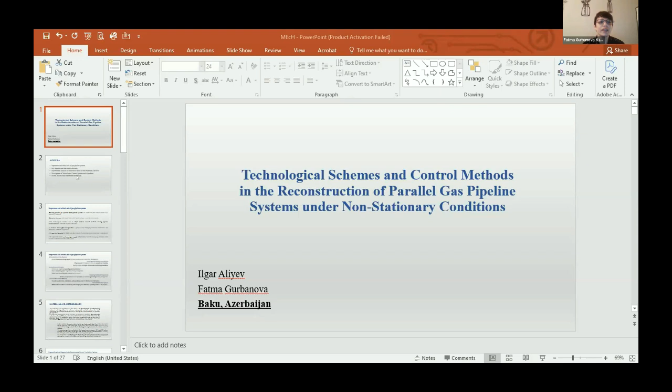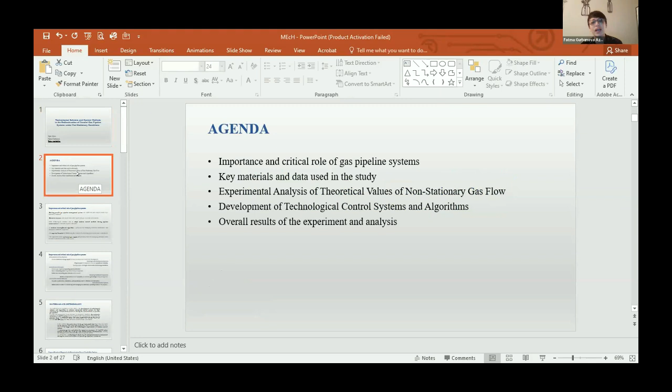Here is our agenda: we will talk about the importance and critical role of gas pipeline systems, key materials, experimental analysis of theoretical values of non-stationary gas flow, development of technological control systems and algorithms, and our overall results of the experiment and analysis.

I will begin with the importance of management systems for the operational process of existing parallel gas pipelines. Under non-stationary conditions, these systems are inefficient and technically complex. Additionally, outdated elements, which are physically worn and don't meet the requirements of modern control technologies, fail to react quickly enough and only report problems after a significant amount of gas is lost to the environment.

For this reason, it is crucial to develop new technological schemes that adopt modern control methods in the reconstruction phase of existing pipeline systems in order to eliminate negative outcomes.

In this work, based on the analysis of the mathematical model of non-stationary gas flow in parallel gas pipelines, an algorithm based on machine learning technology was developed for the information database of the control and management point of the technological process.

The developed algorithm can be recommended for solving engineering technology problems related to the prediction of technical maintenance and management of emergency situations in pipelines.

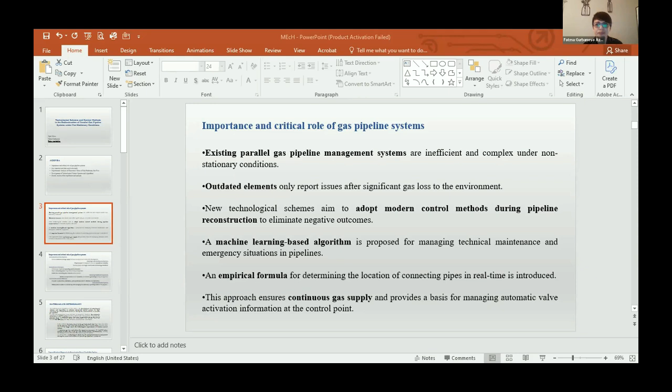Importance and critical role of gas pipelines: the increasing complexity and aging of parallel gas pipeline systems present major challenges to modern energy infrastructure. Wear and obsolescence reduce reliability and safety, making reconstruction and modernization essential.

Beyond replacing outdated components, advanced control mechanisms must be integrated to manage non-stationary gas flow and prevent hazards like leaks. This research is driven by the need to ensure an uninterrupted gas supply while minimizing environmental risks from uncontrolled leaks. Traditional valve activation systems based solely on pressure drop rates are limited, especially in emergencies.

To enhance reliability, we propose a dual criteria approach that integrates real-time valve position sensors with pressure monitoring and IoT technologies. This enables automatic simultaneous valve closure on both sides of a leak, effectively isolating compromised sections.

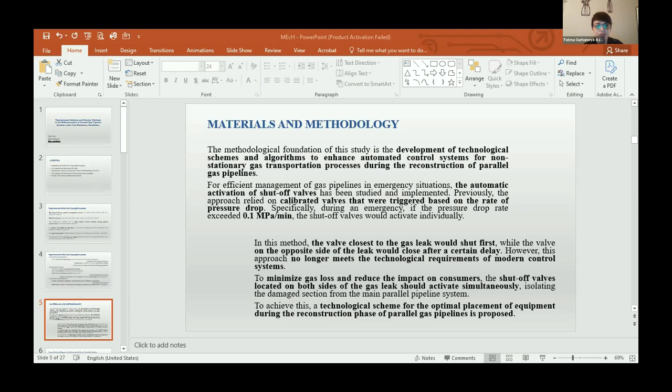They are to be installed after the connection pipe at the beginning of the gas pipeline and before the connecting pipe at the end of the gas pipeline. In the other sections of the parallel gas pipeline, automatic shut-off valves are to be installed on both the right and left sides of each connecting pipe in the network.

For the efficient management of gas pipelines in emergency situations, the automatic activation of valves has proven to be effective in practice.

Previously, valves calibrated based on the rate of pressure drop in the gas pipeline would automatically activate each valve separately if the pressure drop rate exceeded 0.1 megapascal per minute during emergency conditions.

Recently, however, with the application of valve position monitoring sensors, the automatic activation of valves has been successfully tested in practice and has been confirmed as a reliable technology.

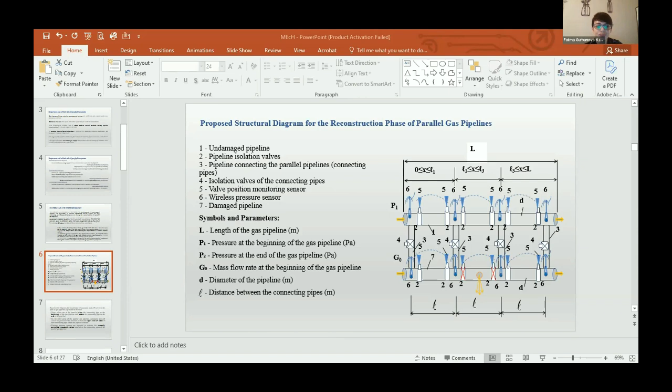I will show: close the valves on the right side of the leak. Thus, the automatic shut-off valves on both the right and left sides of the leak point will be closed simultaneously.

For the remote activation of pneumatic valves installed on the connection pipe of the parallel gas pipeline, wireless pressure sensors are proposed. As shown in this figure, it is suggested that the pressure sensors be installed on the section of the pipeline where the connecting pipes of the gas pipeline are located.

These sensors allow for the monitoring of pressure variations in the pipeline configuration, enabling the control center to track the data via the internet.

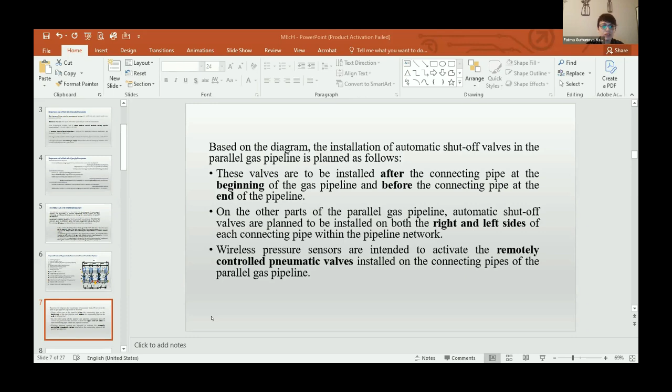In our research, we analyze various transition processes of non-stationary gas flow in parallel gas pipelines.

Specifically, in the event of a breach in the integrity of one of the pipeline sections of a parallel gas pipeline, the process of activating the valves located to the left and right of the damaged section, as well as the remote activation of pneumatic valves installed on connecting pipes for uninterrupted gas supply to consumers, are analyzed together as shown in the figure.

From the moment the valves in the pipeline close, the analysis includes the non-stationary gas flow parameters in three different sections of the damaged pipeline under the activation of the connecting pipes.

Additionally, the technological scheme for the control method of the gas dynamic process of this transition process through a control center is developed in this research.

The use of pressure sensors for monitoring the transition process alongside the valve position sensor is proposed for localizing the damaged section in emergency conditions of the parallel gas pipeline. The methodology of the proposed control system for the parallel gas pipelines follows the scheme below.

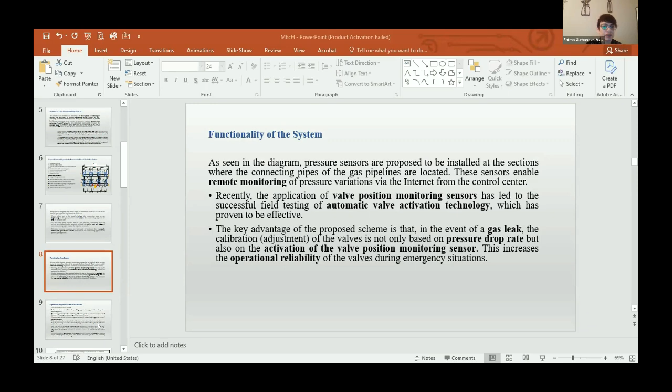In three different sections of the damaged pipeline, analysis of pressure functions of non-stationary gas flow, experimental analysis of the theoretical values of non-stationary gas flow in three different sections, and as a result, verifying conditions during a gas leak.

The status of the automatic valve closure installed on the gas line and the recording of the real-time moment T equal T1 are confirmed. Detection of the location of controlled connection pipes, archiving and analysis of data received from pressure sensors at the control station.

Remote activation of valves installed on the identified connection pipes at the central control station.

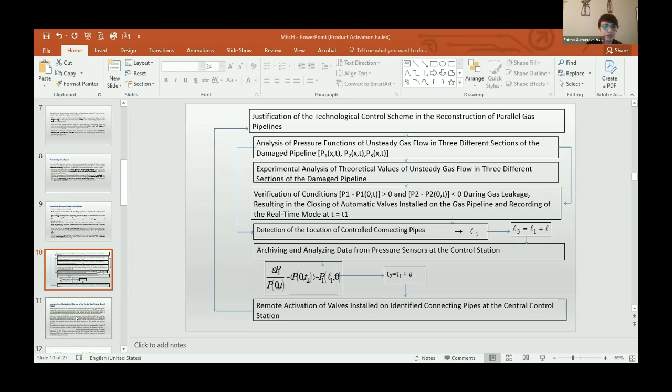Analysis of the methodological scheme of the parallel gas pipeline control system.

The analysis of this methodological scheme of the control system for the parallel gas pipeline shows that data collection through the Internet of Things, as well as data storage and analysis using cloud storage networks, is proposed to be integrated into a control center and reporting methods.

Thus, as a result of a breach of integrity in any pipeline of the parallel gas pipeline, the valves close. The valves located to the left and right of the leakage point close at T equal T1 due to the pressure drop rate reaching its limited value, and the activation of the sensors installed in them effectively isolates different sections.

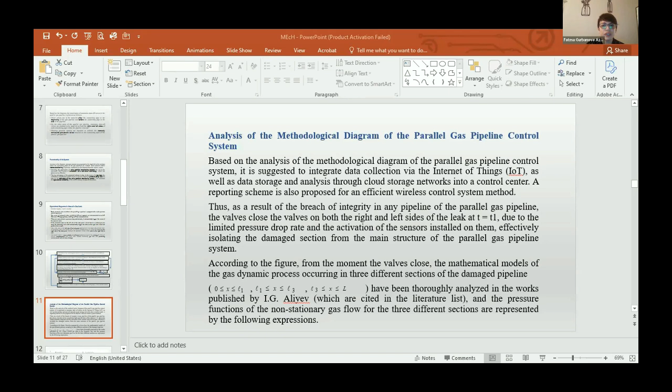As you see in these formulas, we investigated the pressure functions of the non-stationary gas flow for the three sections, represented by these expressions.

Let us assume that for the purpose of localizing the gas leak, the valves installed on the pipelines are automatically closed via the valves at T equal T1 equal 300 seconds.

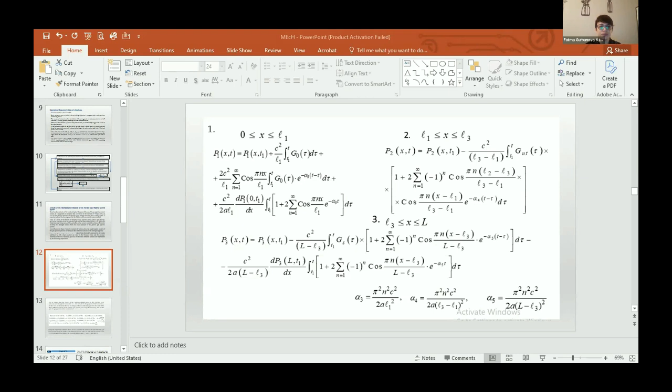For the purpose of leak localization, in this case, to determine the law of change of the non-stationary gas flow for each of the three different sections of the parallel gas pipeline, we accept the following data for the specific gas pipeline under consideration. Using this expression obtained above, we will calculate the values of the non-stationary gas flow pressure along the length of the damaged pipeline in the first, second, and third section every 120 seconds, and record them in the following tables.

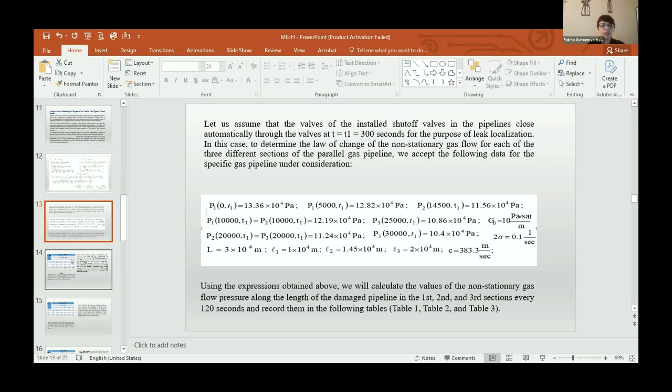In this first table, it can be observed that after the automatic valves on the damaged pipeline are closed, the pressure value along the length of the first section of the gas pipeline increases as a function of time. At the starting point, x equal 0, the pressure value increases from here, and at the interval of t equal 0 to 600 seconds at the x equal 5 kilometer point, the pressure value increases

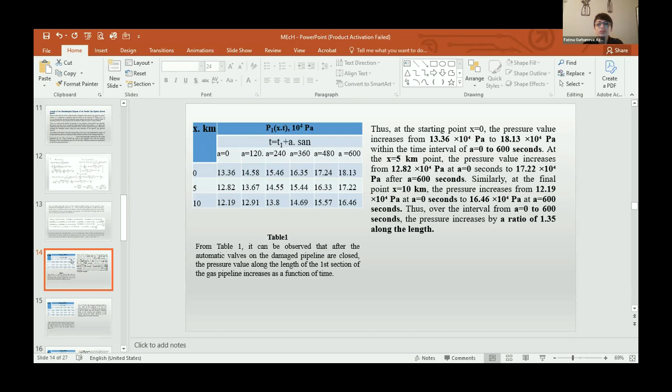from 12.82 at t equal 0 seconds to 17.22 Pascal. Similarly, at the final point of x equal 10 kilometers, the pressure increases from 12.19 Pascal at t equal 0 seconds to 16.46 Pascal at t equal 600 seconds. Thus, over the interval from t equal 0 to 600 seconds, the pressure increases by a ratio of 1.35 along the length.

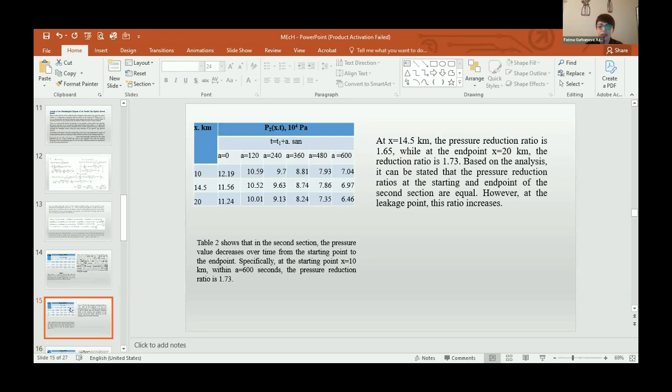As you see in table second, it shows that in the second section, the pressure values decrease over time from the starting point to the end point. Specifically, at the starting point, x equal 10 km, within t equal 600 seconds, the pressure reduction ratio is 1.73. At x equal 14.5 kilometers, the pressure reduction ratio is 1.65, while at the end point x equal 20 kilometers, the reduction ratio is 1.73. Based on the analysis, it can be stated that the pressure reduction ratios at the starting and end point of the section are equal. However, at the leakage point, this ratio increases.

From table 3, it can be observed that the pressure in the third section decreases over time from the starting point to the end point. At x equal 20 kilometers, the initial pressure at 0 seconds is 11.24 Pascal, which decreases to 9.52 Pascal at 240 seconds.

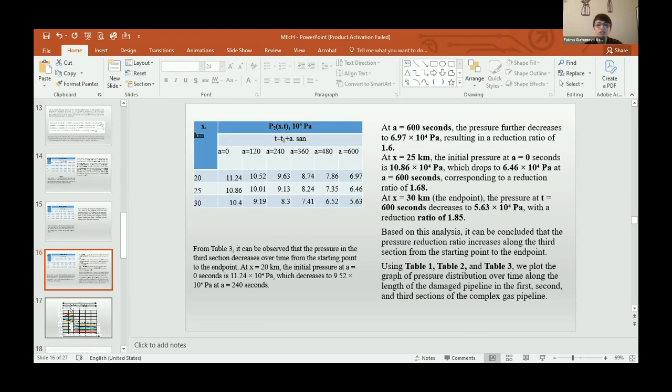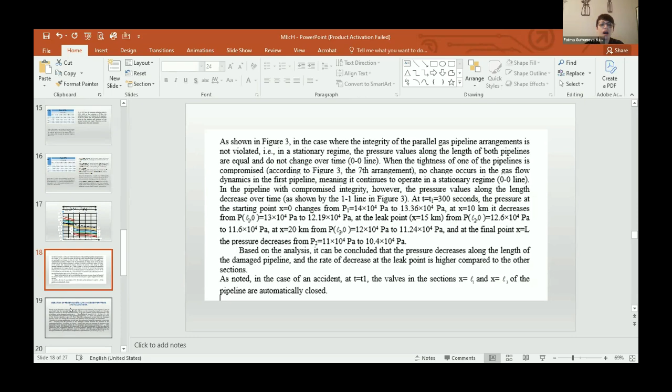As noted, in the case of an accident at t equal t1, the valves in the section x equal L1 and x equal L3 of the pipeline are automatically closed. Creation of a technological management system and algorithms based on the theoretical analysis of the gas pipeline's non-stationary flow regimes leads to the conclusion that the opening of pneumatic valves on the connection pipes at this time in the damaged section is not advisable according to the gas dynamic process requirements.

This is because in the damaged section, the pressure is lower. In the reverse direction, gas will flow from the undamaged section into the damaged section, which will disrupt the continuity and stability of the gas pipeline supply to consumers. Therefore, it is more appropriate to wait until the connecting pipes are opened at a later time, ensuring that the pressure in the damaged section exceeds the pressure in the undamaged section.

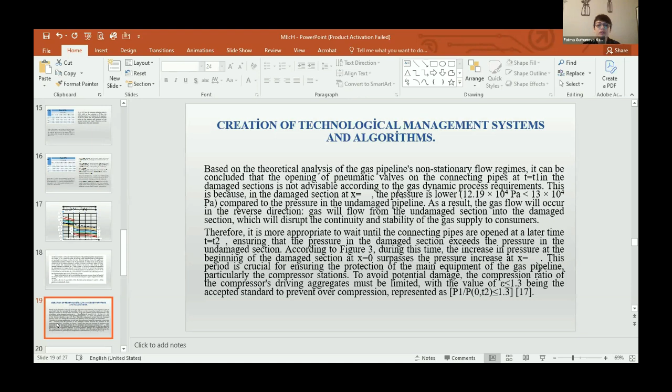According to these figures, during this time, the increase in pressure at the beginning of the damaged section at x equal 0 surpasses the pressure increase at x equal L3. This period is crucial for ensuring the protection of the main equipment of the gas pipeline. The compressor driving aggregates must be limited, with the value epsilon smaller than 1.3 being the accepted standard to prevent overcompression.

On the other hand, as shown in this figure, after the valves installed on the pipeline are automatically closed, the volume of gas supply to consumers gradually decreases over time. To ensure continuous supply of the required amount of gas to consumers, it is essential to remotely activate the valves installed at the connection pipeline.

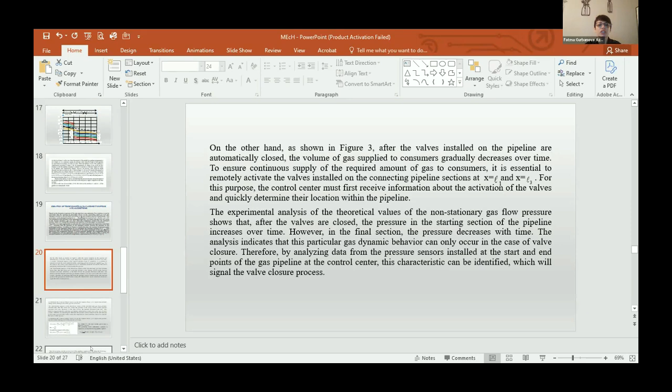For this purpose, the control center must first receive information about the activation of the valves and quickly determine their location within the pipeline. The experimental analysis of the theoretical values of the non-stationary gas flow pressure shows that after the valves are closed, to determine the location of these valves, we use this equation to express the pressure variation at the starting point of the pipeline as follows.

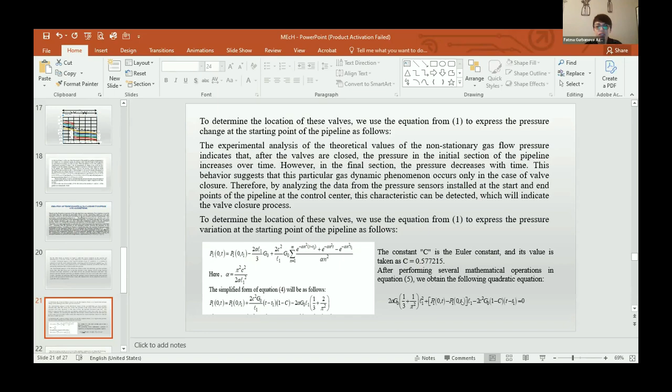The constant C is the Euler constant, and its value is taken as C equal to 0.577215. After performing several mathematical operations in the equations, we obtain the following quadratic equation. By accepting only the positive root of the quadratic equation, we obtain the following analytical formula for determining the location of the automatic valves installed in the connecting pipes.

As mentioned, once the parallel gas pipelines are commissioned, the value representing the step length between the connection pipes is known at the control center. The following analytical expression is obtained to determine the location of the automatic valves installed.

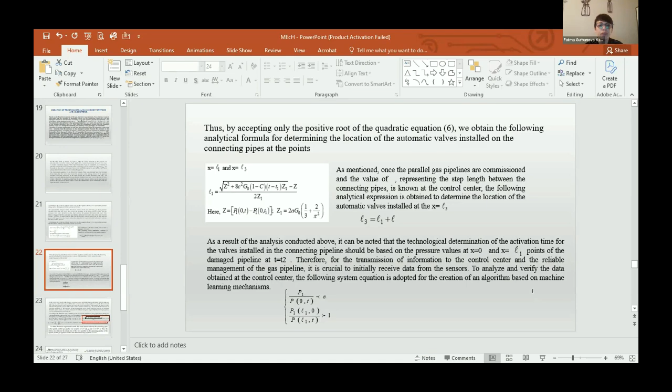As a result of the analysis conducted above, it can be noted that technological determination of the activation time of the valves installed at the connection pipelines, as you see, allows for the creation of an algorithm based on a machine learning mechanism.

In the initial stage, based on the change in pressure values at both the starting and ending sections of the gas pipeline, the control center can record the valve activation status. Using this activation, the location of the connection pipelines to the right and left of the leak point is determined. Subsequently, the analysis of the data from the pressure sensors and the control center confirms this condition.

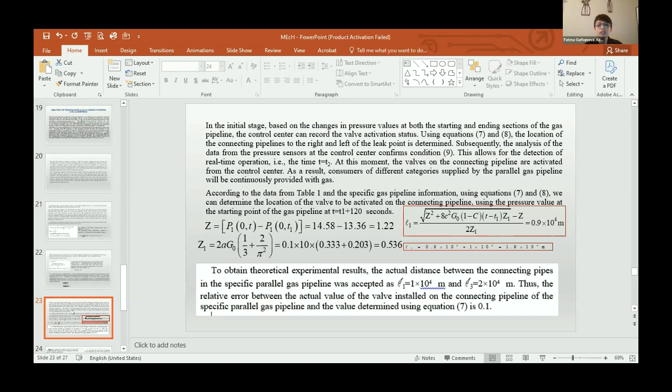To obtain theoretical experimental results, the actual distance between the connection pipes in the specific parallel gas pipeline is accepted as L1 equal to 1 times 10 to the 4 meters, and thus the relative error between the actual value of the valve installed on the connection pipeline of the specific parallel gas pipeline and the value determined using this equation is 0.1.

And for monitoring the reliability of managing the non-stationary gas flow in gas pipelines, the implementation of IoT and cloud computing and data storage systems at the control system will be carried out in the following sequence, based on this figure.

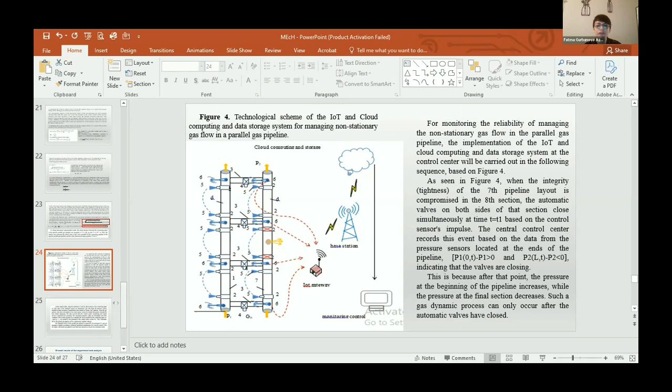As seen in this figure, when the integrity and tightness of the seventh pipeline, the seventh pipeline layout compromised in the 8th section, is compromised, the automatic valves on both sides of that section close simultaneously. This is because after that point, the pressure at the beginning of the pipeline increases, while the pressure at the final section decreases. Such a gas dynamic process can only occur after the automatic valves have been closed.

At the control center, using this, the location of the connection pipes on both sides of the damaged section are determined. The data from the pressure sensors installed at those locations is transferred to the Internet of Things gateway. From the Internet of Things gateway, the data is forwarded to the cloud storage system for storage and analysis through the base station. The data received from the control center's monitoring and control devices is analyzed and calculated.

The calculated parameter values are determined, and if the condition of the system equation is satisfied, the valves installed on the connecting pipes are opened by the personnel at the control system at T equal T2. Thus, consumers fed by the parallel gas pipeline will be continuously supplied with gas.

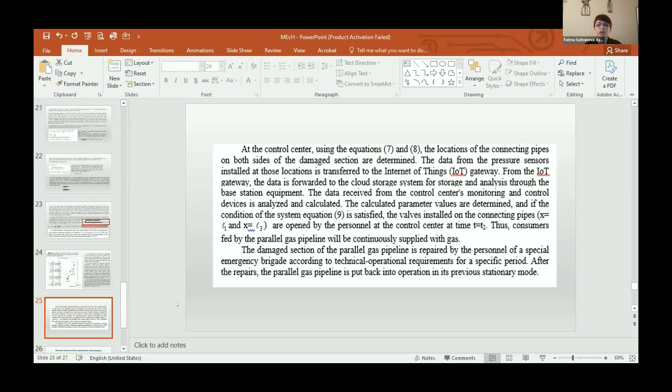The damaged section of the parallel gas pipeline is repaired by the personnel of a special emergency brigade according to technical-operational requirements for a specific period. After the repairs, the parallel gas pipeline is put back into operation in its previous stationary mode.

In the overall results of the experiment and analysis of the mathematical model of non-stationary gas flow reflecting the control process of parallel gas pipelines, an empirical algorithm based on machine learning technology has been defined for the information base of the control center.

The application of the developed algorithm to the technological control system will increase the efficiency of automated decision making. A technological scheme ensuring the application of modern control systems during the reconstruction phase of existing parallel gas pipelines has been proposed to guarantee the reliability and safety of parallel gas pipelines.

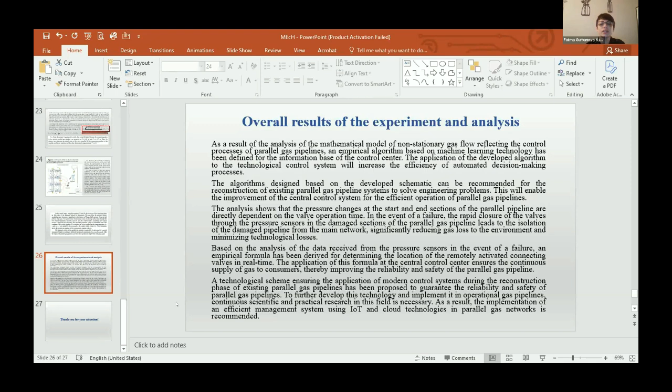To further develop this technology and implement it in operational gas pipelines, continuous scientific and practical research in this field is necessary. As a result, implementation of an efficient management system using IoT and cloud technologies in parallel gas networks is recommended. Thank you.